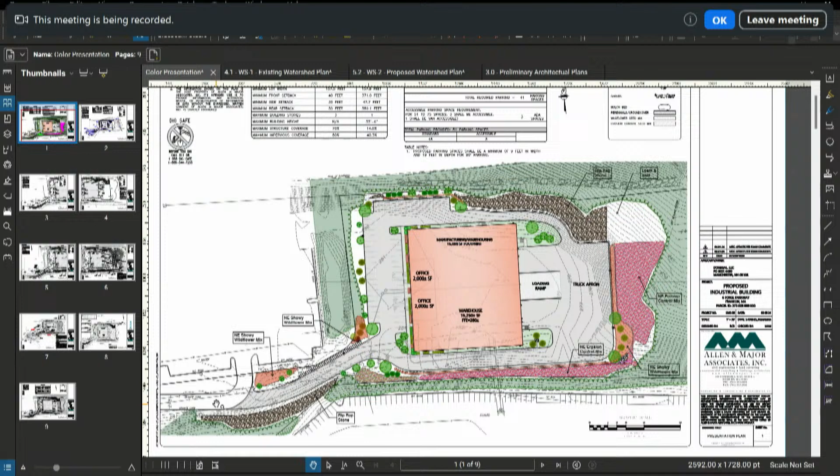And I can show you this figure, we'll zoom in here. So there's an existing shared driveway easement that comes across this as an existing driveway. This is the hotel piece property here, and Six Forge Parkway here. That driveway easement is in place. It was in place as part of the original subdivision that created this lot. As Amy had mentioned, we do meet the lot width requirement as shown here.

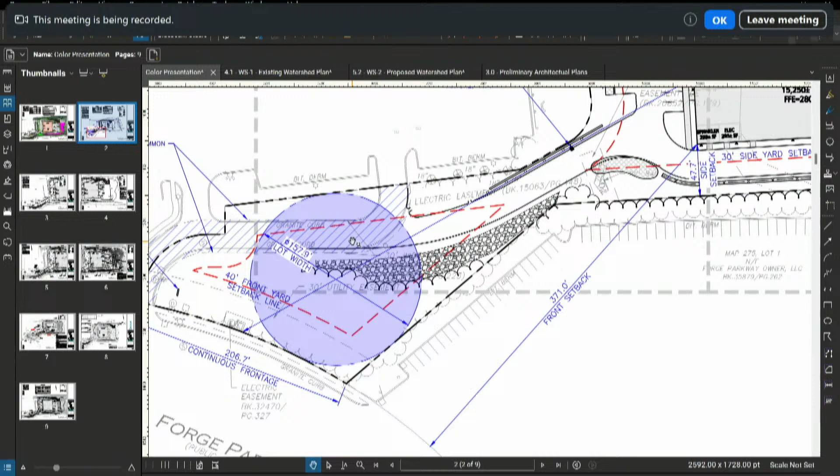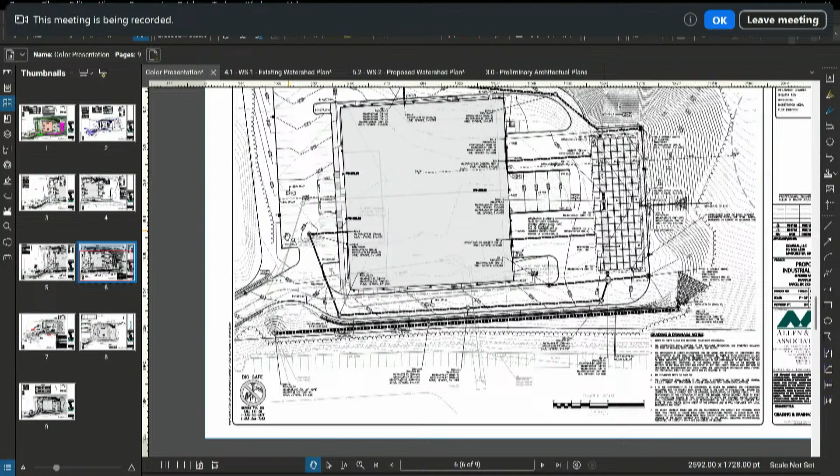The grading and drainage. We do have an infiltration system being shown in the back of the property here with the discharge to the rear towards the wetlands on the backside. We have filed with conservation and received an RDA from them. Closed drainage system here collects in the front.

I'm a little unclear where the DPW director had mentioned about some drainage to off property. Maybe I can get some clarification if we're pointing, but we do have a small collection area here for a bioretention system and infiltration that's provided at this location.

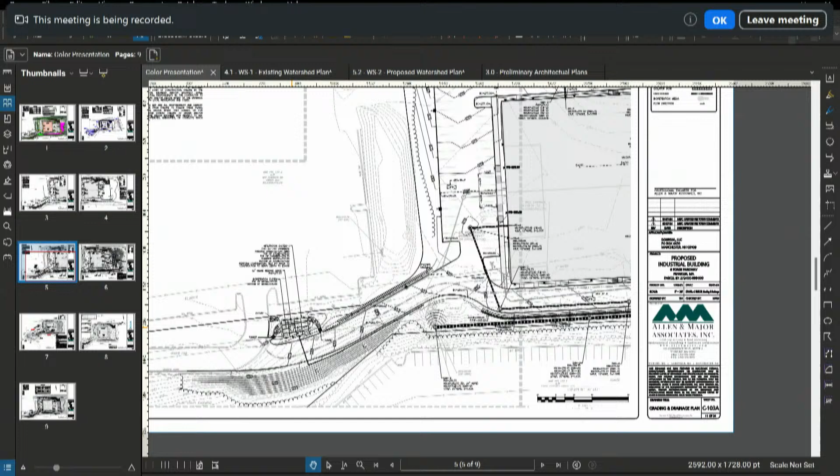Sort of get into water and sewer. We have provided, one of the comments relative from Beta was the fact that we could drive in, so we will have some trench drain, interior floor drains in the building to collect that. We have shown an oil water separator being piped before the discharge to the sanitary sewer.

Waiver for HDPE pipe - we had provided, I believe it was included in the package. I did not see it in the correspondence. That will be an item that we will request a waiver from the site plan regulations to use HDPE pipe on the property.

Wall details - we do have what they call a big block retaining wall that's going along the side. We do show generic details. I know the DPW director had asked for profiles. Typically that would be done as part of the shop drawing as called on our details and the plans that have been submitted. We do call out for these walls to be designed by a Massachusetts structural engineer and the submission of full shop drawings.

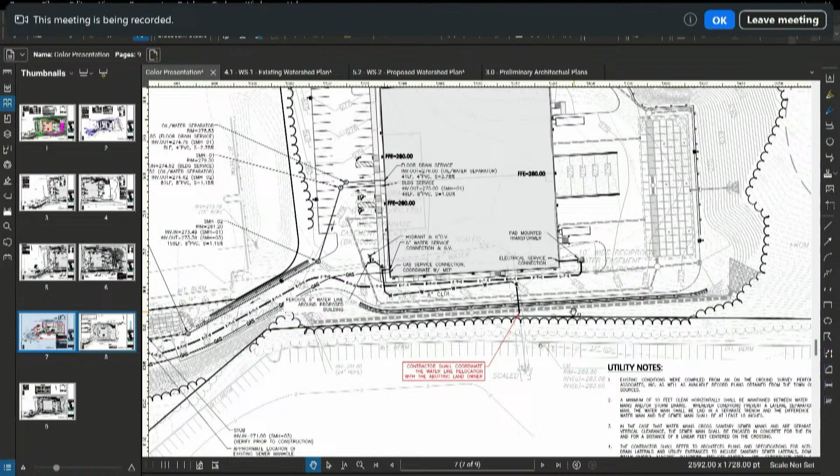That's when typically the full profile would be generated for those, along with stamped calculations. If it pleases the board, we could submit a copy of those for the DPW's files when we get to that point. Be happy to - most of the comments, we have provided a formal response letter to Beta. Most of the items, there wasn't anything that was of major concern.

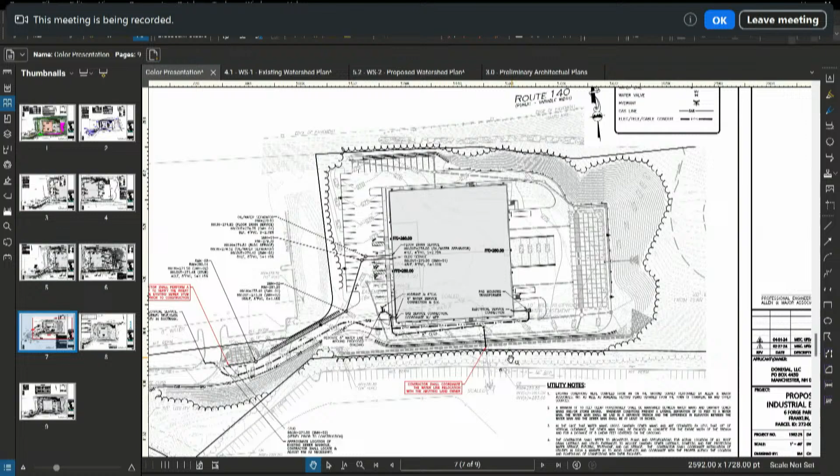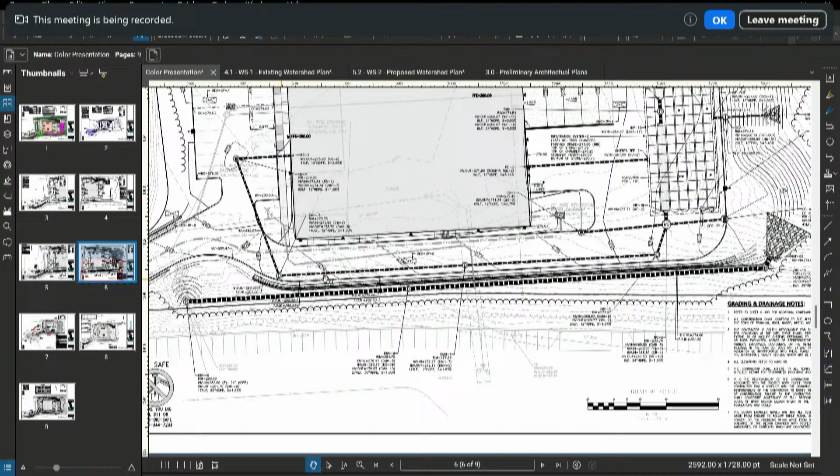As part of our drainage system, there's an existing industrial building off property that drains onto our site. The entirety of the roof drains onto our property, as well as a good chunk of the driveway, and is discharged at two points. The contouring takes the flow towards the back of the property and discharges it there.

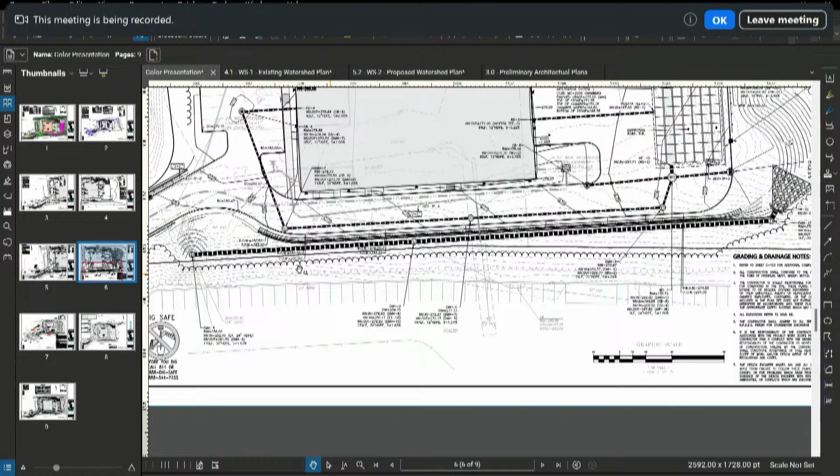As part of the proposed scenario, we are collecting that flow and running it through a closed drainage system with an energy dissipating riprap swale, maintaining the same flow patterns. Per the report submitted to the town and peer reviewed by Beta, we meet the stormwater criteria for pre versus post peak flow rates. We also have a reduction in overall volume due to infiltration, provided both in the large subsurface system and the small bioretention system along the front driveway.

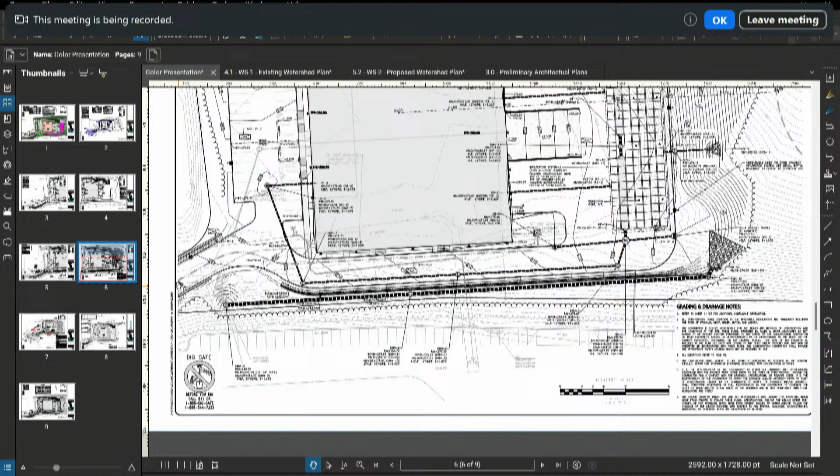Happy to answer any additional questions the board may have. Okay, good, thank you. I'll go to the board first—anybody have any questions, comments?

Jen: Through the chair, could you provide us with a site section in the north-south direction illustrating the relationship of the building to Route 140? It looks like there's about a 17-foot steep climb from 140 up to where the site flattens out, and then a 36.5 foot tall building. So I want to understand the visibility from 140 itself. I know what you're proposing is allowable by right, I'm just wondering what the view is, and if there's opportunity or a need to screen with vegetation. I know it's a tough hill with the riprap, but that's just one of my initial questions.

Okay, thanks. Anybody else? Chris? Oh, go ahead, Beth. Sure—just looking for a little more elaboration on the common driveway. You mentioned that was something considered back when the subdivision was laid out.

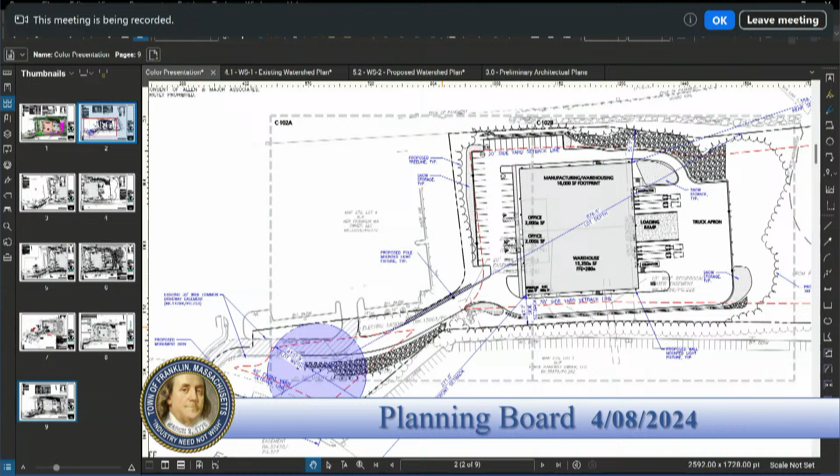My concern is at the top there, backing in the way you said, going down where that radius is, to back in by that top compactor. That looks tight to me, having driven trucks. Yeah, and even at the lowest section, bottom left corner, you get a pinch point right there. I'd like to see how the two trailers are gonna crisscross each other, coming in off the road. You get some tight quarters there for trailers, especially if they're over the road, it'll be fun.

In snow, yeah. Was snow storage on that? There wasn't, but it was asked for. Okay, Mike, that's right here. Okay, yeah, there is snow storage, small spots in these hatched areas. Yeah, snow storage is shown in the crosshatch area.

So we'll wait to hear back. We also have a note on the plan that if it exceeds the areas, it's to be trucked off in accordance with DEP rules. Anybody else have any other questions?

What do you think, Amy? Continuation till May 6th, does that give you enough time to work out some of the bugs between DPW and Beta on turning radiuses, retaining walls, and everything? Yeah, turning radiuses should be relevant, retaining walls too. So if you need to go out a little bit longer, that's fine.

Driveway requirements - Beth, excuse me, Amy's gonna look into the common driveway. Okay, so I'll make a motion to continue Six Forge Parkway to May 6th. Second. All in favor? Aye.

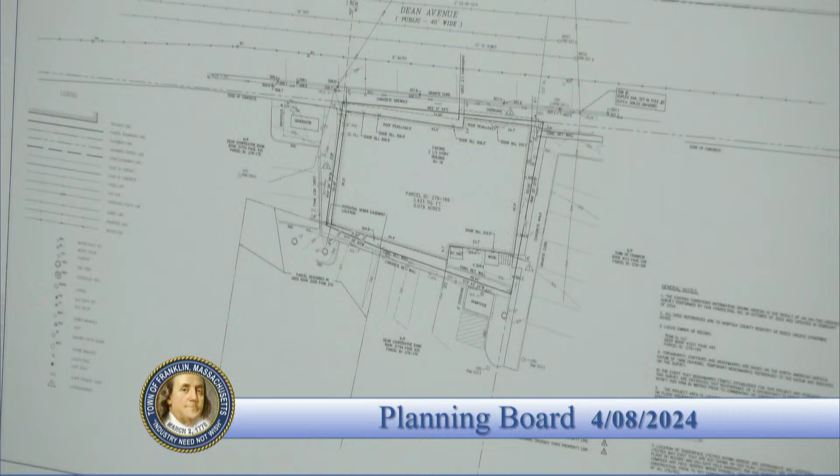What we're looking at here is the existing condition plan. I do have 11x17s if the board would like to view the plans closer. I'm good, thank you.

As you can see in the existing condition plan, the existing building and lot are pre-existing non-conforming in many aspects—some of which are building setbacks, lot area, lot coverage. So we're trying to do the best we can to bring the lot up to or into compliance with all applicable codes—zoning code, building code, stormwater regulations.

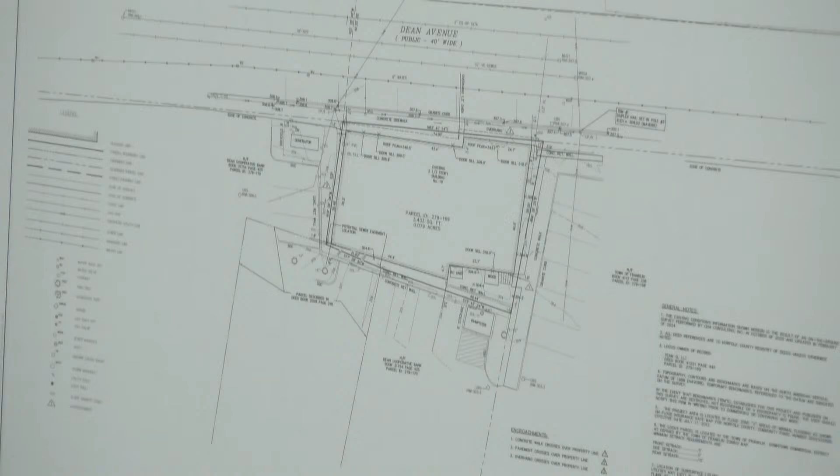As mentioned earlier, we're proposing to demolish the existing building that was constructed in 1910. It's a dilapidated commercial building with 3 commercial units on the first floor and 3 office spaces on the second floor. Currently the site does not have any stormwater control measures, so runoff eventually makes it to the right-of-way with no infiltration whatsoever, and there are no parking spaces provided on the existing conditions. I'll move to the next slide.

So as you can see, we're providing—just going to move forward a little bit—we're proposing 3 units, unit A, B, and C, and then we have a commercial piece, unit D. Unit D will be used mainly for the owner's purposes; I believe he's going to use it as an office for his business. We are providing 3 garage parking spaces, labeled 1, 2, 3 in circles.

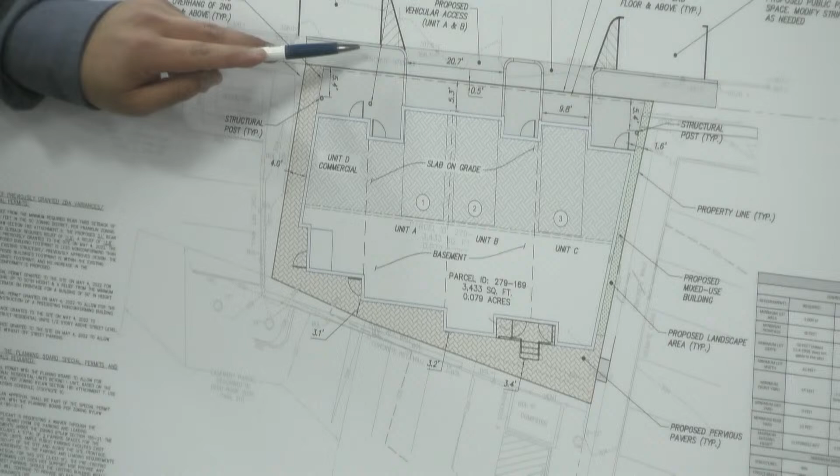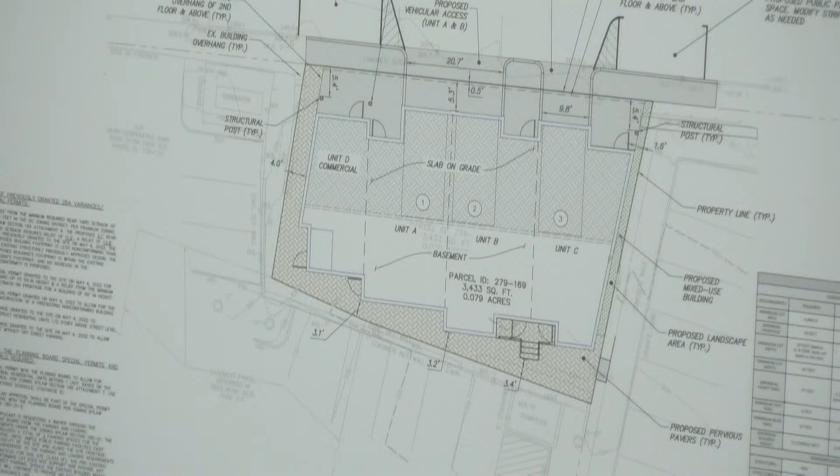They will be accessed directly through Dean Ave. We are proposing 2 curb cuts on Dean Ave for the purpose of accessing the parking spaces through this area and that area. We will be modifying the striping along Dean Avenue to accommodate the entrance to the building, and also provide on-street parking spaces utilized for the commercial space. Within the site vicinity there's ample public parking within 300 feet for any additional parking needed, and again we're only looking for 3 parking spaces to comply with the code.

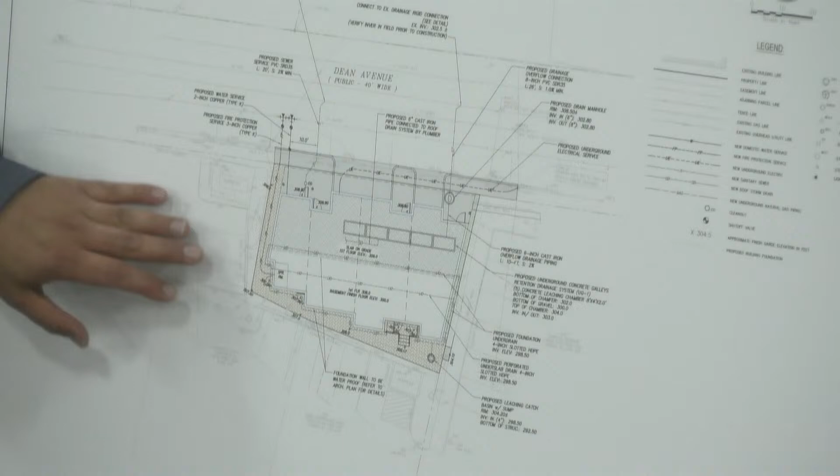The next slide shows the utilities and drainage improvements we're making to the site. The front half of the building will be slab on grade, which will allow us to install underground chambers for infiltration and groundwater recharge. We'll be collecting roof drains internally in the building and directing them underground. In the back, we'll provide pervious pavers and walkways sloped toward a leaching catch basin, which also provides infiltration and groundwater recharge.

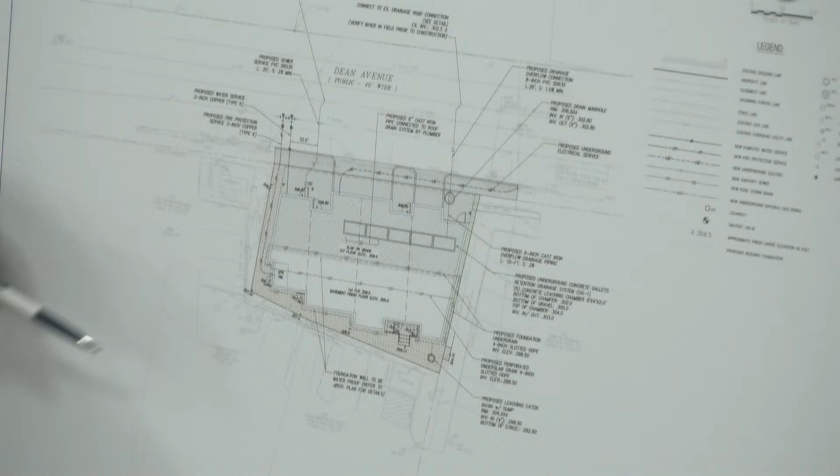We're also providing a foundation under-drain because of the underground infiltration system within the building footprint, so we want to protect the basement space in back with a foundation under-drain and under-slab drains, connected to the leaching catch basin. We'll connect to the town's drainage with an overflow pipe. We've provided calculations showing a reduction in runoff and volumes to Dean Ave.

Beta Engineering had a long list of comments on the plans and design. Unfortunately we weren't able to see them until today, so we'll be addressing them for the next meeting, but we don't see anything that's a deal breaker. We'll clarify any questions and provide any additional documentation needed.

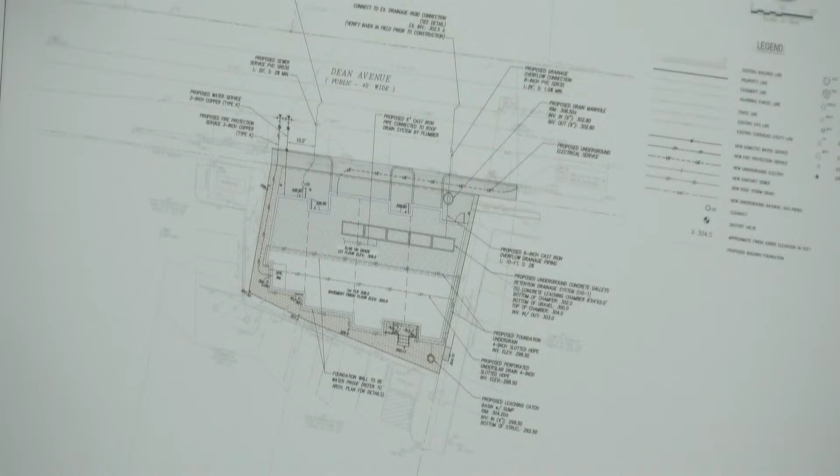We'll be connecting to the city's sewer system with a sewer connection from the building, and also gas and underground electrical. So we have some architectural renderings, and I hope Liz can see the screen and explain what we're looking at.

Yes, can you hear me okay? Yep, yes, great. Thank you, Mr. Chairman and members of the board, for allowing me to share our team's concept design.

First, I'd like to point out that we did study the context and the surrounding context within close proximity to the site. Our goal for the new proposed mixed-use building at 19 Dean Ave is to fit appropriately within its immediate downtown commercial and residential context.

We especially focused on the curved facade of Dean Bank in immediate proximity to the site. The nearby funeral home has a similar form, and these rounded bays have been built throughout New England for over a century and are still very much utilized today. Materiality and color is important to take note of, and the composition and scale of windows from both nearby commercial and residential buildings are important to reflect.

If you could go to the precedent slide. I can't see the screen, but I can speak to it. I think if I speak, she will be able to see the screen. Is that how it works? Maxine, I can't see the deck.

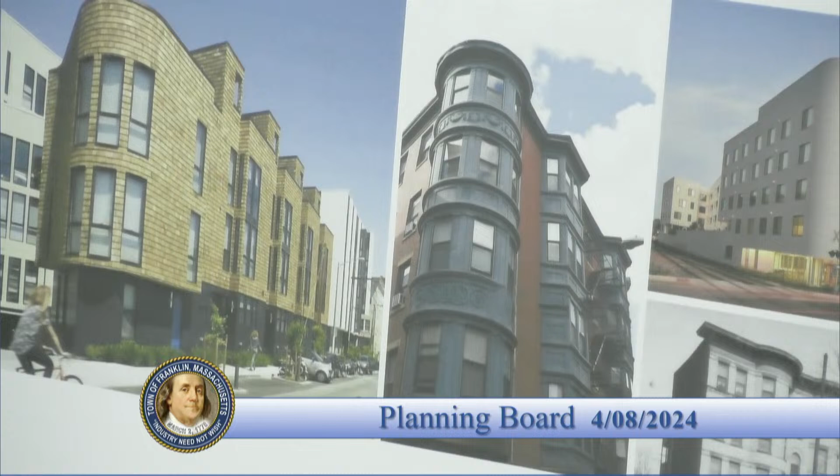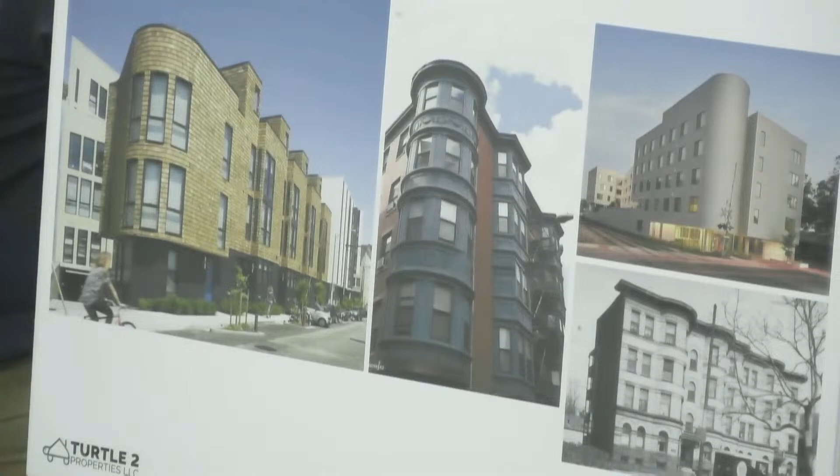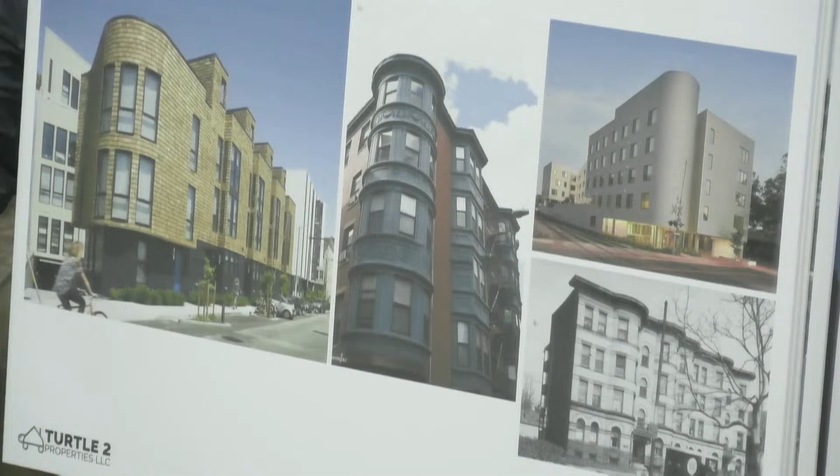Oh, perfect. So these are precedents we looked at carefully to think about how this building should be designed and developed. Historic buildings with rounded bay forms and double hung windows and siding of a shingle scale are forms we're interested in that echo New England architecture. And given there is a commercial unit at the base, we included a more contemporary example of that on the upper right. Okay, we can move to the first view.

So this 3-story mixed-use building has a commercial space at the base, parking and entries for the 3 2-story townhouses above on levels 2 and 3. And we've incorporated that rounded bay set adjacent to the rounded corner of Dean Bank's facade on Dean Ave.

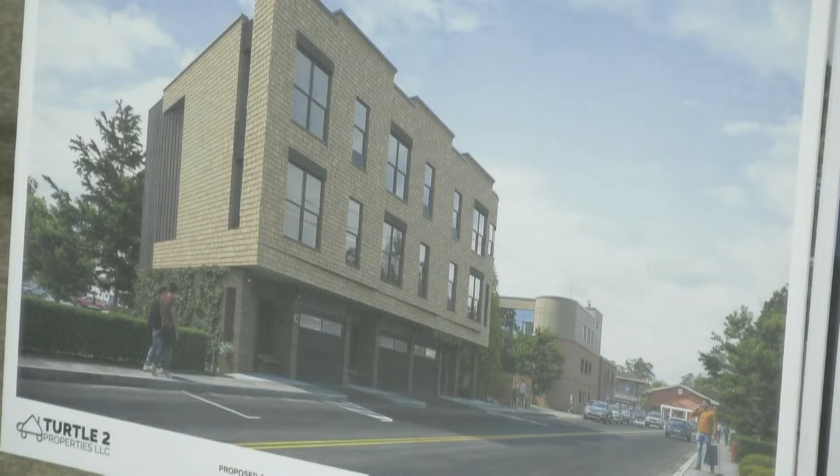Excuse me, could you point out where that rounded bay is? I don't really see it. It's on the right side, the opposite corner. You may see it on the next rendering. Okay, you see it on the next rendering, all right. You said next rendering? Yes, next rendering, please.

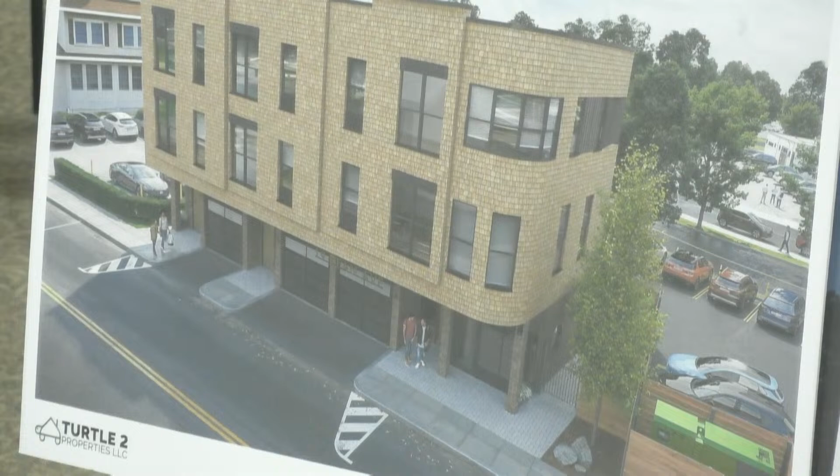So this view is looking toward the front facade facing Dean Ave, and you can see that complementary form mirroring the form of the Dean Bank. Our goal is to create a building that speaks both to the commercial corridor and architecture of Main Street, but also responds to the residential scale buildings on Dean Ave. The design utilizes appropriate materials that echo surrounding structures, the double hung windows common to both commercial and residential structures. And then the last view, please.

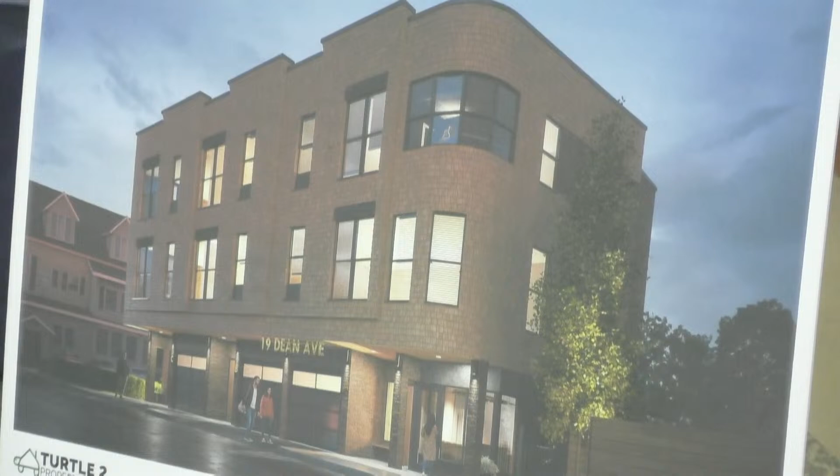This is the night view at the front-facing facade on Dean Ave, and it gives you a sense of the building's street view by night, how the building will be illuminated, and the scale of that base as it sits along the sidewalk. The overall aspiration is that this building very much complements the fabric of downtown, but also speaks to the residential neighborhood as we understand it on Dean Ave. Thank you very much. Thank you.

Mr. Chair, if I may add, I want to correct the record that we're not requesting a special permit for the building height. There is a note on the plan about a special permit for the building height, but that special permit was granted through the Zoning Board of Appeals for a different building. However, when we had multiple conversations with the building commissioner, we were told we do not need to go back to the Zoning Board of Appeals for additional waivers or variances. So we just wanted to note on the plan that a previous special permit was granted to the site to allow for a building height of 50 feet. But this building height will comply with the maximum building height in the downtown commercial district, which is 40 feet in this case, or 3 stories.

Good, thank you. Okay. I know Beta had some comments and questions.

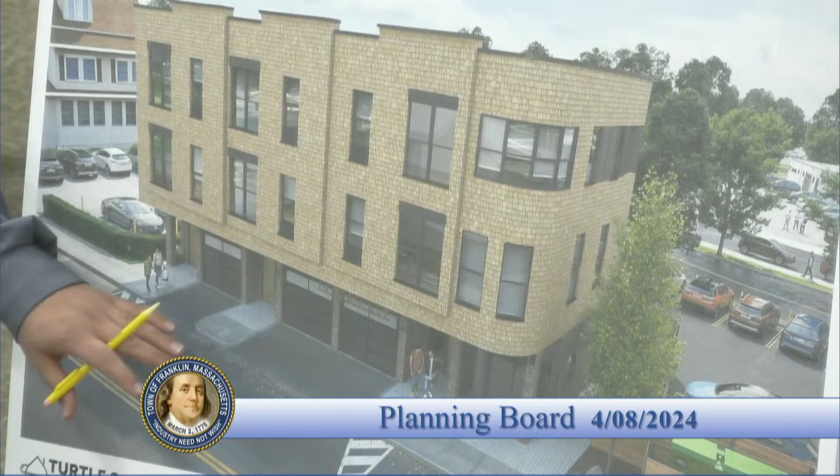Just to address the Chair, if I may - the site access, this is the only site access we have, this is the site frontage. Yes, I understand the concern about the elimination of the 2 parking spaces in the front, but this is the property's frontage, and denial of site access might be hard to do. The site is abutted by Dean Ave on 2 sides, and then by town property on this side, which also has public parking spaces.

Yeah, I understand it's a challenging site. We would love to see this redeveloped, right? It just, what is the right approach to it, and appreciate that, but we'd love to see some more thought. It's a hard site to redevelop, but do you need to maximize the site with 3 units? Can you do 2?

Access seems an issue on the left side of the lot. Your whole storefront is your garage doors. I think that's what Beta was getting to. It's taken away from the commercial growth that we're trying to get in the downtown to bring people in, to bring it back to where it was at one point, but yeah, it's a tough site too.

Mr. Chair, I believe one of the aspects we're dealing with is the financials of this project. So reducing the number of units may not make this project financially feasible. The owner didn't go with a 4-story building with 12 units and ask for parking elimination. He tried to accommodate everybody and not be too greedy with the development. But at the end of the day, the development has to make financial sense to the developer. Otherwise, it may not develop at all.